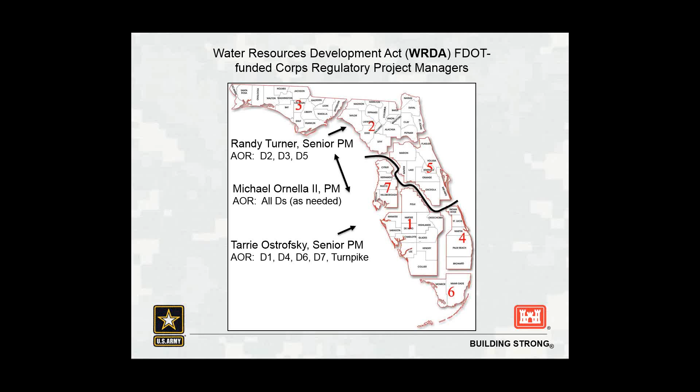All right, good morning everyone. As Amy said, I'm Mike Ornella, located in the Jacksonville district office. I'm a floater throughout the state, everywhere from the Panhandle down to Miami.

Today my presentation is going to be on our applications and our nationwide permit program. That'll be followed up by Tarrie, and she will take over standard permits and the specific regional general permit 92.

So the first thing we can look at here is our ENG 4345, which is our standard application document. I'm sure most of you have seen it, most of you have filled it out, and we can take a look at it in depth, of course. One second, we had a broken link.

This form is the one we look at that's going to have all the information the Corps needs for its permitting process, and there'll be some tips and tricks here as we look at it to provide a complete application to us so we don't go back and forth multiple times.

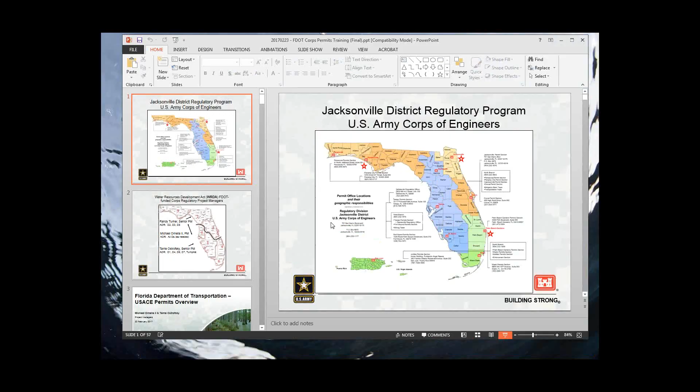When I said about the project description, if there's not enough space on that ENG 4345, an environmental narrative should be submitted with the application, and that will help us fill in all the holes that may not have fit on the application itself. And I know that a lot of you already have these environmental narratives submitted all the time. They're very, very descriptive, very helpful in our decision-making process.

The lat long, as I said earlier, decimal degree format, that's the example. And if you go to that, I think that lat long will put you on Colby's head over in Chipley.

So another thing, we have a joint application with the state, and recently we have a federal supplement that comes out because federal authorization is going to be required for your work in addition to the state of Florida. So this supplement can be submitted with Section A of the joint application, the authorization for submerged lands, and the federal dredge and fill permits. And what it is, is a 5-page document that has additional information that the state or the joint application does not cover completely. So that is something to be aware of, that the federal supplement should be added when applying through state.

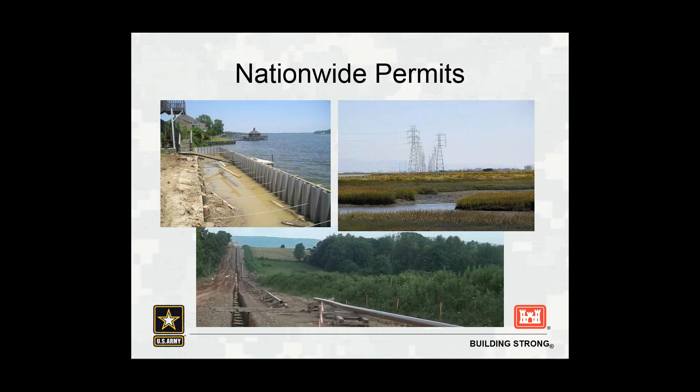I'm glad to help. So moving on to nationwide permits. This is our nationwide permit program. Some examples of things we permit through our nationwide permits there. So we're going to go over a couple things: what's a nationwide, some specific nationwides and the general conditions, the contents of pre-construction notification, our regional and special conditions, and then we'll talk about the expiration of the nationwides, which is coming up right around the corner.

So a nationwide is a general permit. It's always minimal impacts, usually less than half of an acre. These nationwides are issued by our headquarters every 5 years. The last one was done in 2012, so that means they're expiring 2017, next month.

It authorizes activities across the whole country, so we're not specifically here in Florida. They have their general and regional conditions, which then bring the specificity down to Florida to form those nationwides to fit our program here.

So the process for issuing a nationwide is a rulemaking activity. And like I said before, the most recent version was published on March 19th and is set to expire on March 18th, 2017. We will get into what that means in a little bit.

So nationwides are an expedited 45-day review process for minimal impacts. Examples that we utilize are utility lines, transportation, bank stabilization, commercial institutional development, repair and maintenance of existing structures. Those are the ones that we will see most likely with FDOT projects.

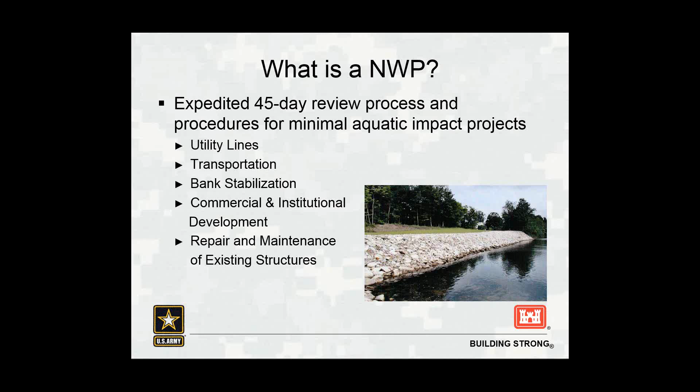We'll go over a couple of those just quickly. But for the main ones that we will be utilizing with FDOT, the first one, Nationwide 3, maintenance. This is Section 10 and 404. The biggest thing to take away from maintenance is that the structure or fill is serviceable and previously authorized. So that pretty much means there has to be a permit somewhere from the Corps saying this was authorized at some point.

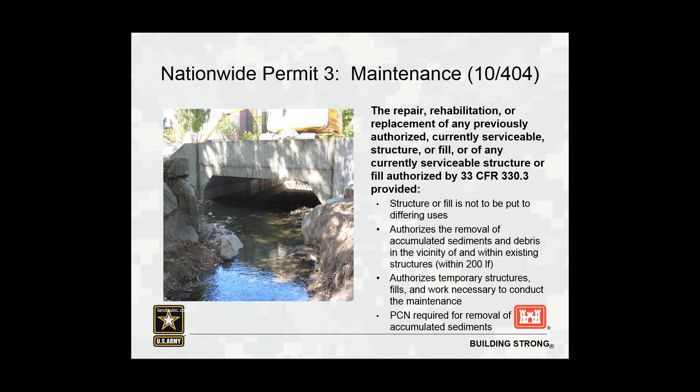You can't have a different use of the project. It authorizes temporary structures around for that maintenance. And then the PCN, pre-construction notification, is required for removal of accumulated sediments. One thing to also note about the 3 is that it will account for minor deviations, but very minor, can't change the use of the structure. But if you need to add a little bit for a safety improvement, it's possible that that would qualify under Nationwide 3.

The next one is the 6, which is survey activities. Also Section 10 and 404. This includes stuff like core sampling, trenching, sample plots. It does authorize temporary pads. Does not authorize fill for roads or permanent structures.

And in the 2017 nationwides, there will be a new pre-construction notification requirement for manatees. In the past, as long as you weren't doing seismic exploratory activity involving manatees, you could go forward and utilize nationwide permit number 6 without notifying us. But now the regional conditions have changed to where PCN will be required for nationwide 6 use no matter what activity it's going to be.

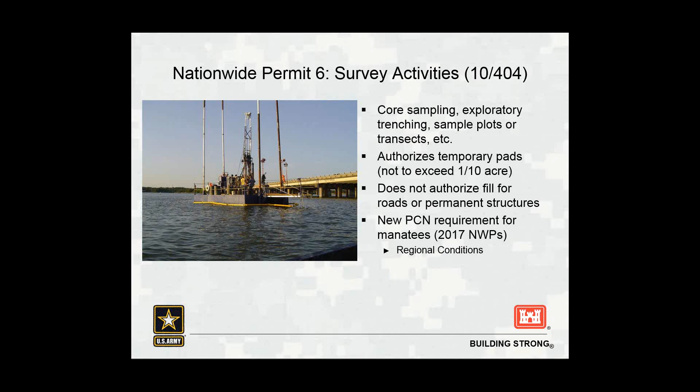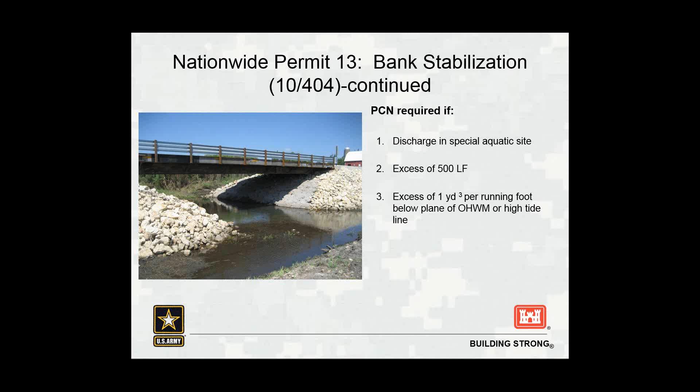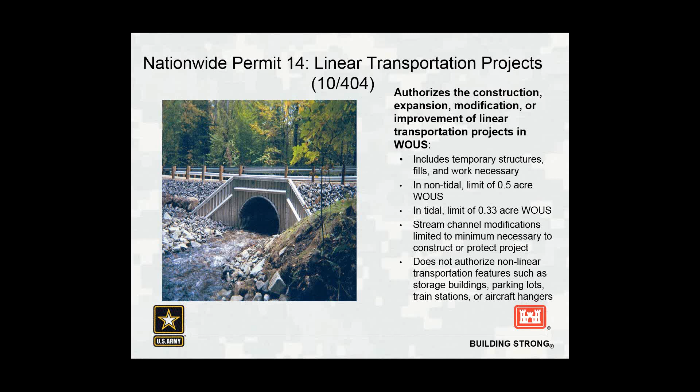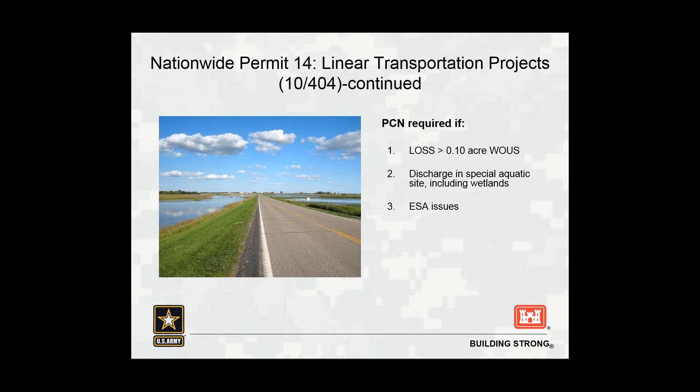Then again, PCN required for greater than 1/10 of an acre, discharge in special aquatic sites including wetlands, and ESA issues. So that almost guarantees that a PCN is going to be required for all submittals for the Nationwide 14.

This one is kind of a vague one that could be utilized under certain circumstances: Nationwide 39, commercial and institutional developments. Note that it is non-tidal. Building pads includes features like roads, parking lots, stormwater management facilities, and recreational facilities. Half an acre limit, 300 linear feet of a stream bed, and if that stream bed is intermittent, that can be waived. Can't be used for golf courses, ski areas, and oil and gas wells. And you cannot use it in non-tidal adjacent to tidal. A PCN is required for those.

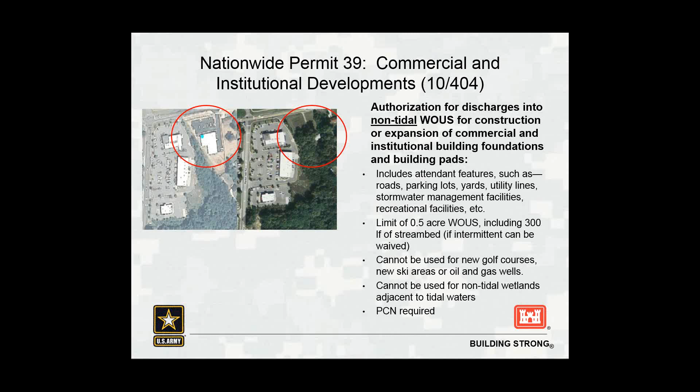So a few less common nationwide permits that we might run across is the Nationwide 15, which is the U.S. Coast Guard approved bridges. The Coast Guard is responsible for permitting bridges. The Corps is responsible for the fill associated with the run-ups, the abutments, the shoreline stabilization, but we are not in the business of putting a bridge in a water. Coast Guard is the lead on that and will be responsible.

Nationwide 33, temporary construction access and dewatering - this is for maintenance areas, like if you've got to dewater around a seawall to run some maintenance on a footer. Those are less common, but we do see it. The 41 is the reshaping of an existing drainage ditch - if you're going to be moving it over, and it doesn't fit under the 14, we can work on figuring out a way to get that under the Nationwide 41. And then the 46 is also discharge in ditches, and that will be a case-by-case basis as it comes along.

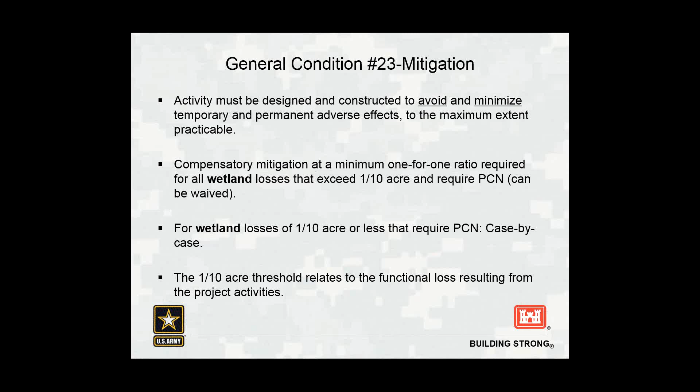You can't use mitigation to increase acreage losses allowed by the limits of the nationwides. Near streams, we will most likely require establishment, maintenance, and legal protections such as conservation easements of those riparian areas next to open waters.

The permittee may use mitigation banks, in-lieu fee arrangements, or activity-specific mitigation. In all cases, the Corps' hierarchy of mitigation is we're going to want you to go mitigation bank first, in-lieu fee second, and then permittee-responsible under a watershed approach, permittee-responsible on-site and in-kind, and as a last resort, permittee-responsible off-site and/or out-of-kind, which is one we want to avoid at all costs if possible.

Mitigation may also be required when functions and services of a water or wetland have been permanently adversely affected. So if you're converting a forested wetland system - mowing it down and pulling the trees so it becomes a herbaceous wetland area - we will likely be looking for mitigation for that functional loss, because those two types do not share the same function.

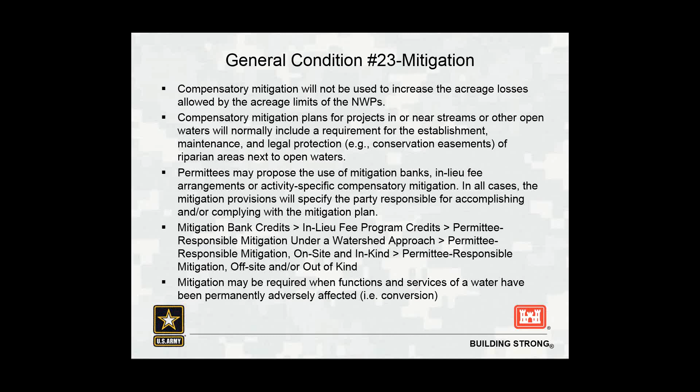So then the pre-construction notification, PCN, is required. We must determine if it's complete within 30 days of receipt, and as a rule, request additional information only once. A lot of times, a formal request for that first RAI will scatter over into specifics into a couple emails. No work is going to begin until you're notified in writing by the Corps.

We can include special conditions, and if 45 calendar days have passed from the receipt of a complete PCN, provided there are no ESA issues. With the Eastern indigo snake, there's likely going to be ESA issues across the whole state. Even if the 45 calendar days passed and the applicant can begin work, they're still going to be bound by all of the nationwide permit general conditions. So all of that list we just went through are all applicable if you begin the work.

So general condition 18 or 20 is going to require a PCN. You can't begin the activity until the Corps tells you there's no effect on the species or no potential to cause effects on the historic properties, and or the fact that we completed consultation with Fish and Wildlife, NMFS, or the State Historic Preservation.

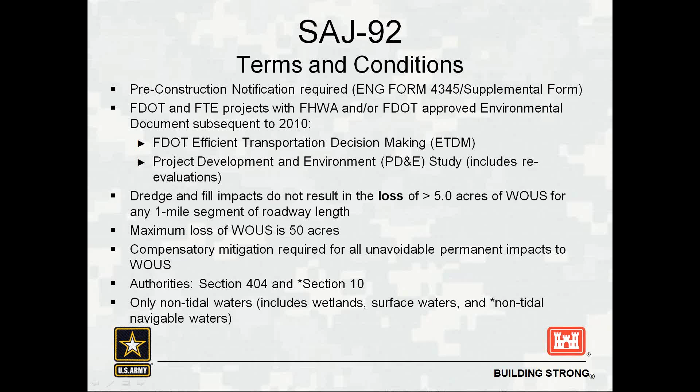The SAJ 92 authorizes both non-capacity and capacity projects. Non-capacity projects refer to activities such as safety improvements, roadway maintenance activities, addition of bike lanes and sidewalks, etc., as the lower left picture reflects. Capacity projects generally refer to projects which propose the addition of travel lanes, such as roadway widening projects, as the picture on the right reflects. But I know you all have a better understanding of capacity and non-capacity projects than I imagine the Corps does.

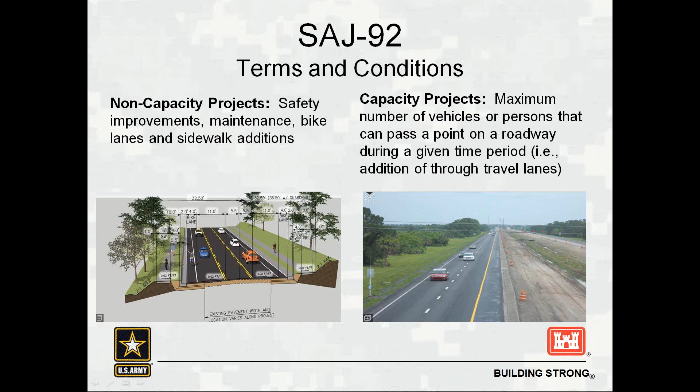The SAJ 92 also identifies activities that are not authorized, including stream channelization or bank-to-bank filling, and the relocation or culverting of more than 300 linear feet of perennial or intermittent natural stream systems. Natural stream systems do not include ditches, canals, swales, or other man-made non-natural systems. And I've been in Florida for over a year, and I haven't seen very many natural stream systems.

Proposed activities must not increase flooding. A project must not impact the pre-construction hydrology or water quality of a stream. The severance of upstream and downstream connections is not authorized. Projects proposed in Monroe County are not authorized. And a very important condition to be aware of is that the SAJ 92 does not authorize the construction or establishment of new roadway alignments, meaning non-existing roadways.

As with all proposed projects, the Corps is required to evaluate the potential effects that the project may have on endangered species and their habitat, as well as on cultural resources. Mike also talked about this for the nationwides. For Section 7, evaluation and determinations may be carried out through the use of programmatic agreements, using keys, or through informal or formal consultations, depending on each particular project and the species that may be affected. As Mike mentioned, consultations may have already occurred prior to submittal of an application.

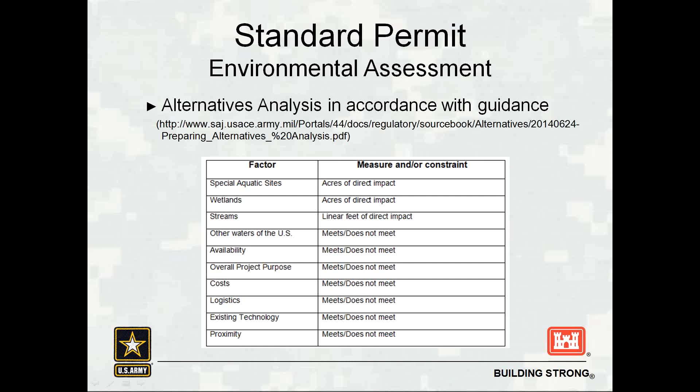The EA also includes the Corps' evaluation of the 404B1 guidelines if the authority includes Section 404, which is generally the case for linear transportation projects. There's generally fill within waters. The guidelines include potential effects on the physical and chemical characteristics of the aquatic ecosystem, biological characteristics of the aquatic ecosystem, and other things like that.

Also, evaluation of avoidance, minimization, and mitigation efforts are required. This information was included in the public notice. When we're writing this document, it may be the same as what was in the public notice, or the information may change if the project had been modified or new information had been provided.

Evaluation of cumulative and secondary impacts, which are anticipated to result from the proposed project, are also required. This includes evaluation of past, present, and reasonably foreseeable future impacts.

The EA also includes information regarding compliance with Section 7 and Section 106 and how the project has been brought into compliance if effects on resources were identified. We would also include the evaluation of all species considered for Section 7. They're all in this document.

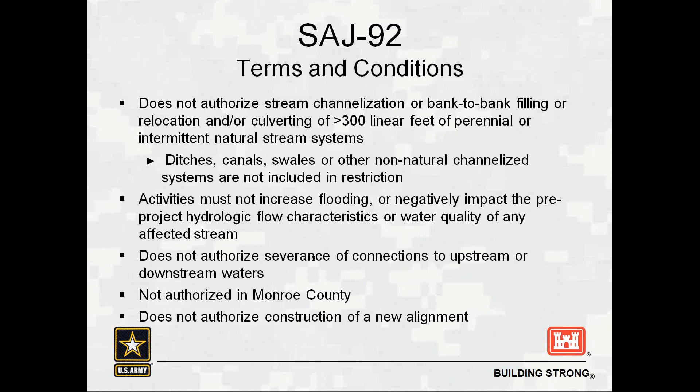Well, as we said, ESA issues are going to trigger PCNs on almost every single project that we come across, mostly because of the eastern indigo snake being a statewide species.

But Andy, do you have any input on that one? Oh, there are certain few and far between cases that may not have any associated ESA issues. For example, if you've got, say, a ditch that clearly does not have any ESA implications, and you're under a tenth of an acre, that kind of project, say like a culvert crossing or something, could be subject to the non-PCN, less than a tenth of an acre.

Okay, well, thank you. Does anybody else have any other questions or anything with the training? Another question. Okay, so we have another question.

We generally submit the ENG 4345 as an attachment to the state application. Does the new federal supplement fill this requirement?